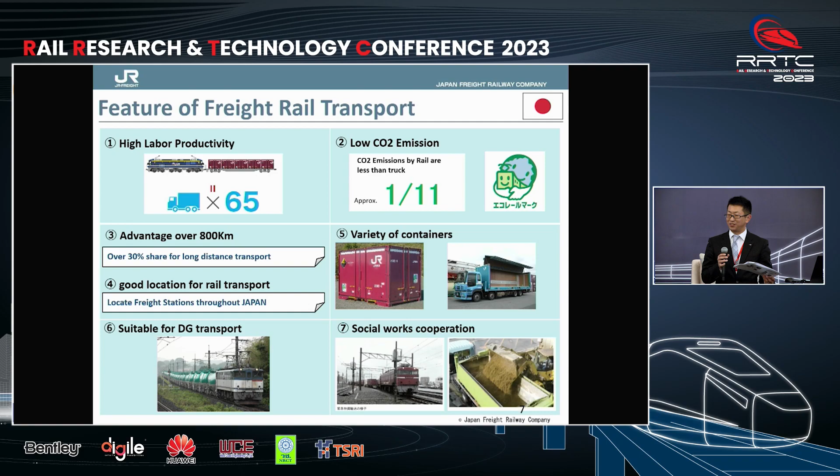Not only railway business, we also engage in real estate business, mainly developing freight stations. For example, two buildings, Tokyo Rail Gate West and Tokyo Rail Gate East, have been completed at Tokyo Freight Terminal Station. The freight station, in front of a huge warehouse, will be utilized to expand logistics.

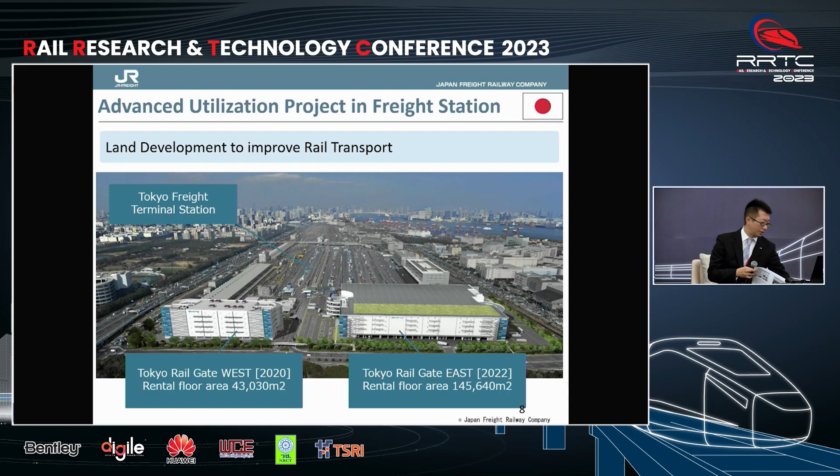Not only in Japan, now JR Freight starts business activity outside of Japan. We are aiming for overseas business, our third pillar. The first pillar is railway business, second is real estate, and third pillar is this overseas business.

We invite many persons from outside government, railway operators, and manufacturers to our facilities to guide them to freight stations and maintenance factories. We also participate in several surveys in countries such as India, Myanmar, Indonesia, and so many others.

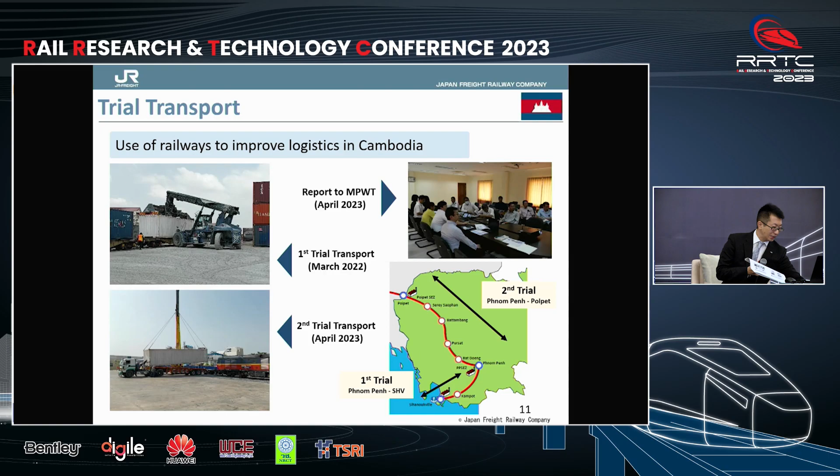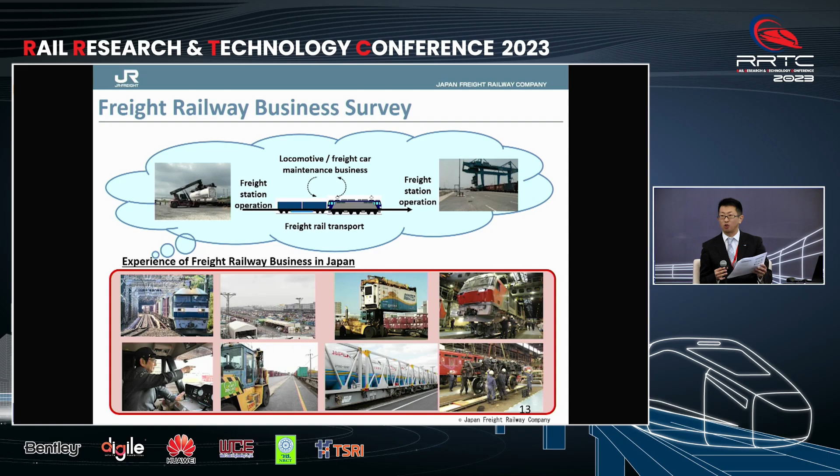Our second theme is our experience at JR Freight Japan. I will pick three examples of our experience, and the first is freight train operation.

In container transport, not only railway transport is needed - we need cargo collection and cargo delivery to connect to our customers. In Japan, this is done by railway forwarders, performed before and after our railway transport. In Japan, railway forwarders exist in many cases, around 150 companies. Collection and delivery are handled by different companies, so JR Freight needs to connect each of the three players to realize one multimodal transport.

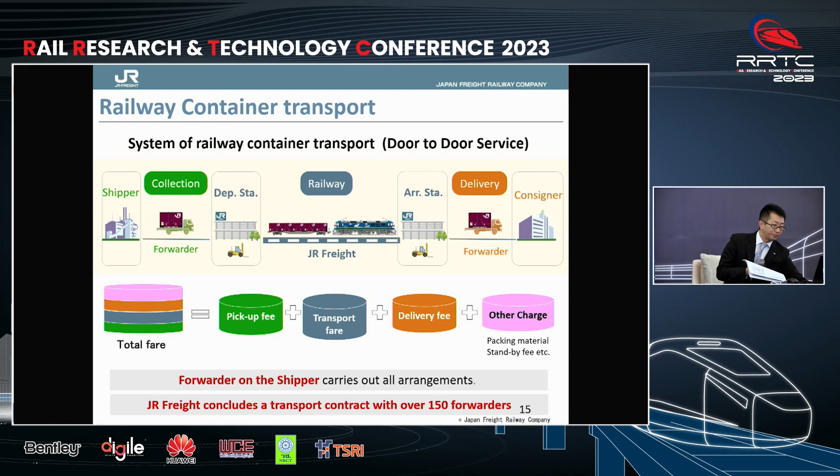Next, talking about layout in the freight station. Since most main lines in Japan have been electrified, almost 70%, work at a conventional freight station in Japan involves many procedures using electric locomotives for the main line and diesel locomotives for shunting. It takes a long time between train arrival and departure. I will show some animation.

After arrival, we need to switch the locomotive from electric to diesel. The first one was electric, and now the diesel locomotive does the shunting. After shunting, we lift on or lift off the containers. After that activity, we need another shunting for departure, and after that we can depart to the main line. This is almost 5 steps.

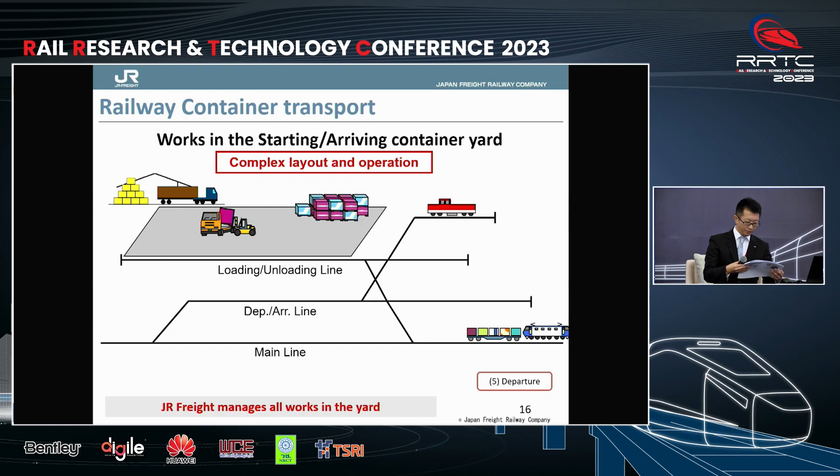In order to make main line operation more efficient, we changed the layout of our freight stations. What we changed was that the track line where the electric locomotive arrives and departs also serves as the cargo handling line. The animation is like this: after arrival, the train goes onto the cargo handling line, and after Lo-Lo operation, the train departs. It's a very simple procedure.

As a result of the new layout, containers that previously could not be unloaded immediately can now be unloaded immediately after arrival, and the freight train can now depart immediately. JR Freight has introduced this new layout at 31 freight stations in Japan.

Next is the system. We use 3 systems to control the entire freight railway transport, named: 1, IT Frens; 2, Trace system; and 3, Driver system. First, IT Frens has an interface with customers and also a management system, and they have a management function for operating freight railway.

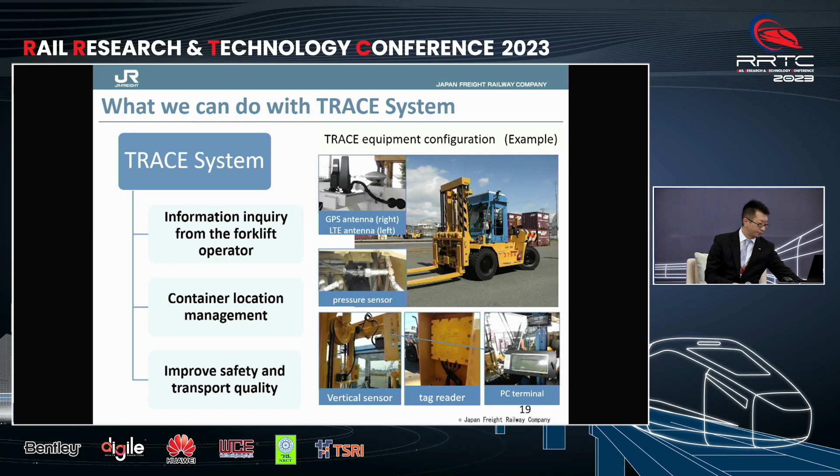In the cabin, the forklift operator checks the container information from IT-FRENS. When the forklift catches the containers, based on the information from IT-FRENS, the operator lifts on and off one container.

Sorry, this is only in Japanese, but they can understand the information about what to do next. Using this information, our operator operates one container per minute.

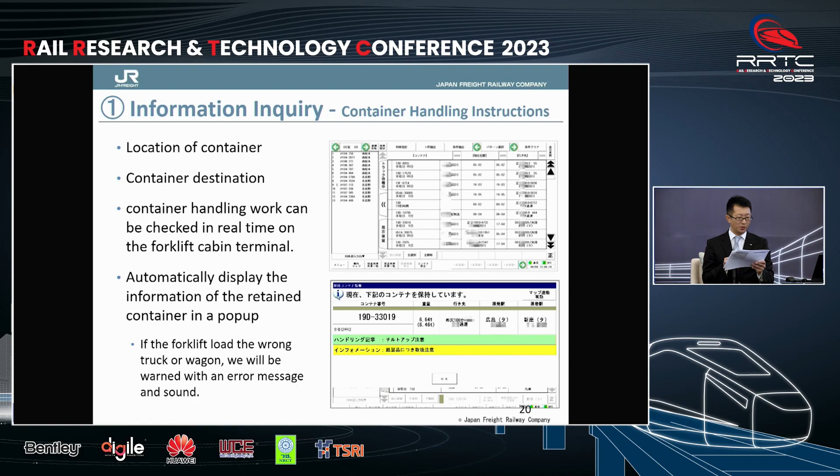This is for your reference. It takes 2 or 3 minutes for a reach stacker in another country like Thailand to lift on and off, or 4 or 5 minutes for a gantry crane at a port operation. So it's an amazingly speedy operation in Japan.

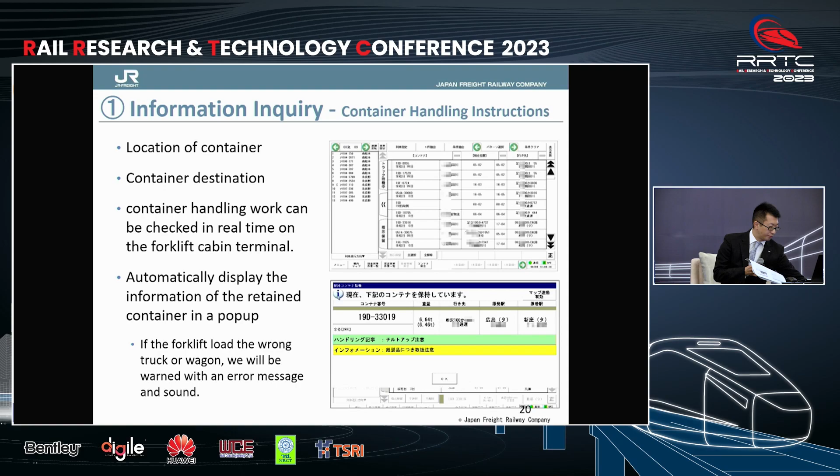Next is safety. Safety is the most important thing for a railway operator. So of course, in the trace system, we guarantee safety. When we handle dangerous goods, we alert the operator like this.

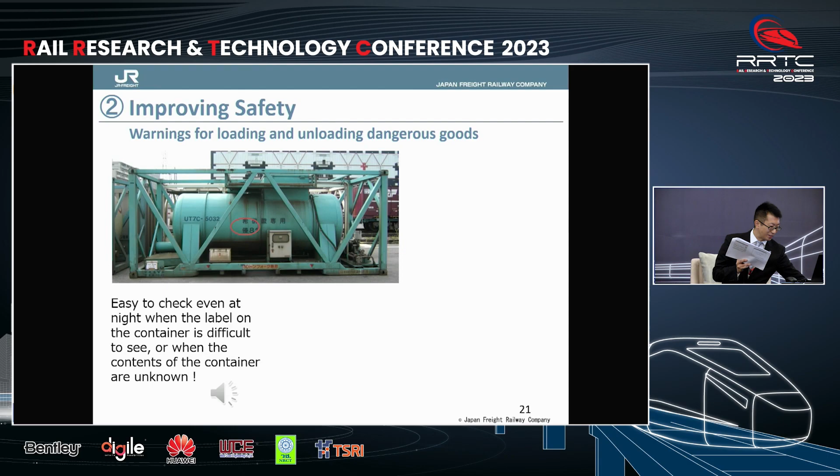Sorry, some sounds happened after that. Okay, no sounds now. But some sounds happen in the operator's cabin.

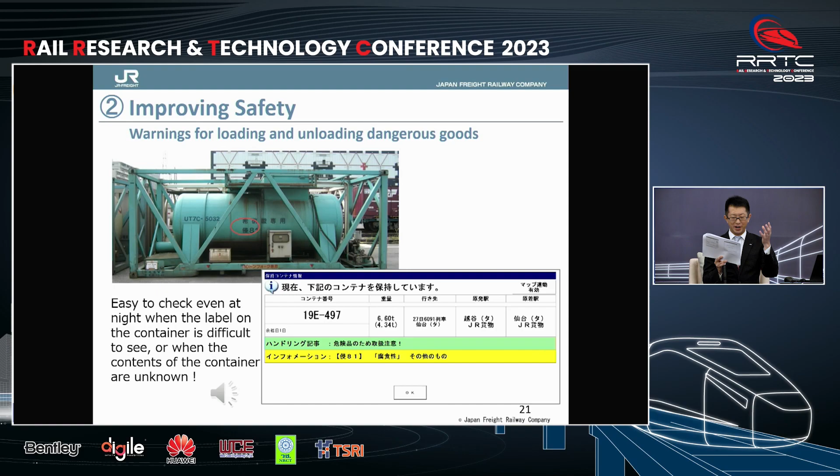The third function is location. Yes, trace is a location system. So not only for our work, but our customers require detailed location of their cargo. We provide real-time cargo location, and we provide accurate container location not only on running trains, but also in container yards.

This is a map of the container yard at our station, and we can trace exactly which container is where.

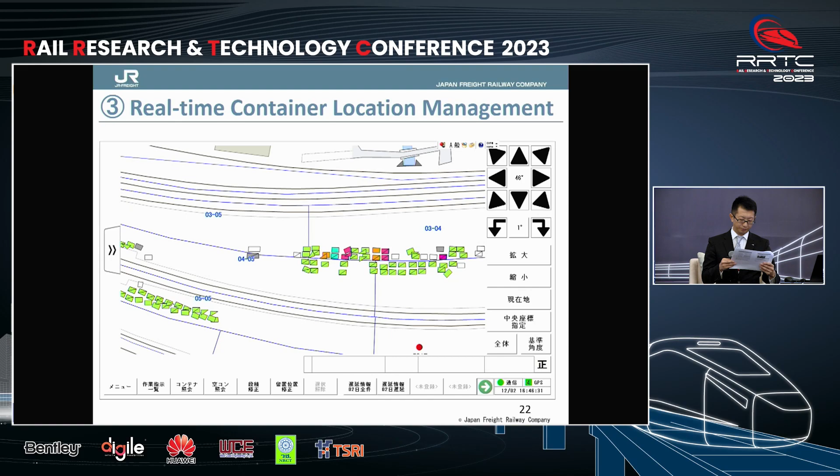Okay, next experience is driver training. I will explain about driver training in Japan.

We train rail drivers in-house at our company. Based on the laws and rules of the Japanese government, JR Freight prepares a course at our own in-house training school and a skill course with actual driving on locomotives. The two courses combined take about one year to train a fully licensed driver.

JR Freight would like to share its knowledge. Maybe one year is shorter than in other countries, so we would like to share this knowledge of driver training with other countries and contribute to solving their problems.

I will introduce the training school in our company. As shown in the photographs, safety is the top priority. So we conduct safety education to learn about serious accidents that occurred in the past. In our school, we also have a classroom for learning signals and a driving simulator.

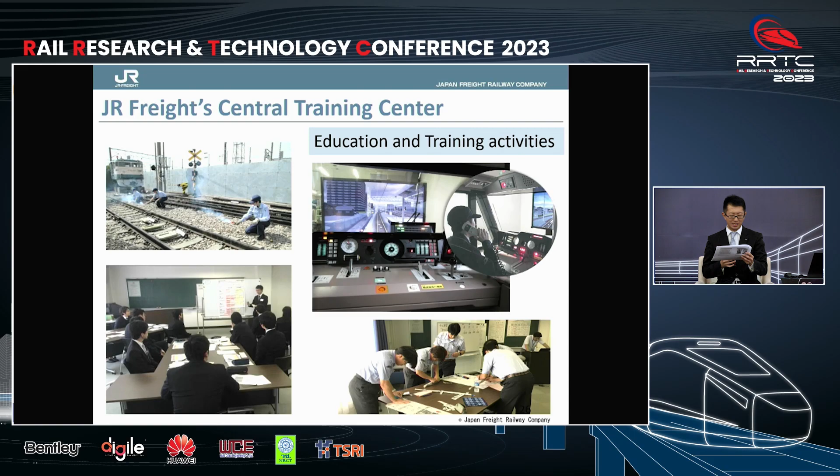After our employees enter the training school, they spend half a year living and eating together while taking intensive training. In addition to desk study, trainees acquire skills through simulator training in which sample trouble occurs.

The next slide shows some samples of simulators. The locomotive simulator is capable of reproducing 20 different types of accidents. The students need to deal with the accident taking place right in front of them quickly and appropriately.

Okay, for the final experience, I will introduce the rolling stock maintenance. First, I would like to explain the environment in which we operate our rolling stocks and perform maintenance.

JR Freight has a railway network from the north to the south of Japan. The environment in the northern area belongs to a sub-Arctic zone, and its winter is so severe. While the southern part belongs to the subtropical zone, the temperature and humidity are high all year round.

Our track gauge is 1067mm, a little wider than GMS countries, which use a 1 meter gauge. And for safety reasons, each rolling stock must be well maintained to stop within 600 meters, even at maximum speed. This is our environment.

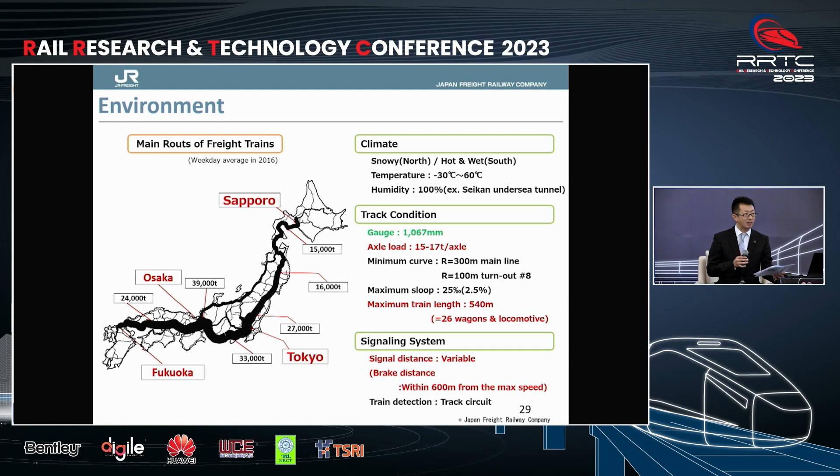We have developed rolling stocks together with manufacturers. We don't buy catalog locomotives. We develop locomotives and rolling stocks with manufacturers and maintain them ourselves.

About 70% of Japanese lines are electrified, as mentioned. We have DC electric locomotives and also AC electric locomotives. On non-electrified lines, we use diesel locomotives.

To reduce the environmental impact, JR Freight also developed the HD300 series, a hybrid diesel locomotive, which has a small diesel engine along with a large storage battery, a lithium-ion battery.

And not only locomotives, we own the wagons. There are two main types of freight wagons: container wagons and tank wagons. Container freight wagons are all owned by JR Freight, and tank wagons are owned by shippers, like oil companies. But maintenance is all undertaken by JR Freight. Also, the dry container is owned and maintained by JR Freight, and some shippers own the tank containers or refrigerator containers, reefer containers.

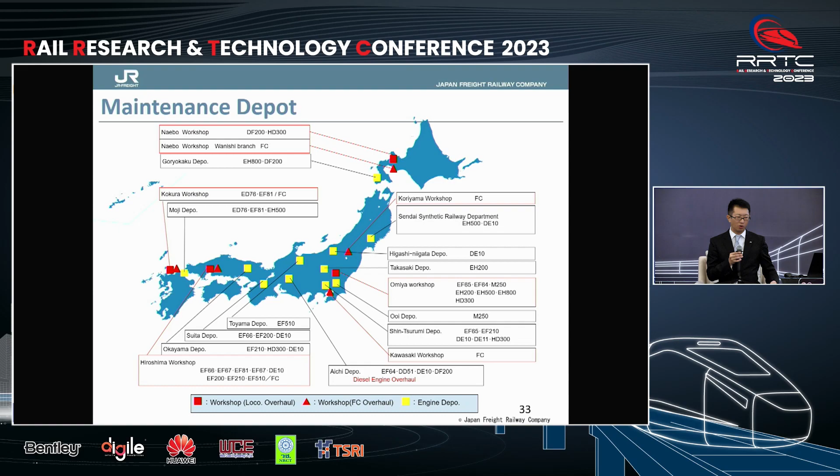Next, we have maintenance depots in each region where each locomotive type is mainly used. There are overhaul depots, four for locomotives, four for freight wagons, so eight overhaul depots total. Based on the railway laws and regulations of the Japanese government, from daily inspection to overhaul, we have four stages of maintenance.

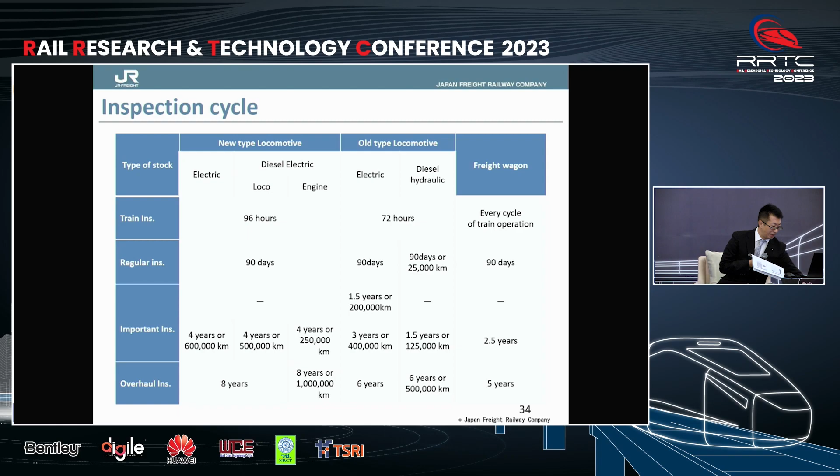In this last presentation, I will pick up three JR Freight advantages in maintenance. The first is the inspection management system. Instead of repairing after it breaks, we analyze the condition of rolling stock and past failures and repair in advance. We call this preventive maintenance. It's a keyword. All work activity is recorded in our IT system and used to share the condition of each rolling stock and analyze failure trends.

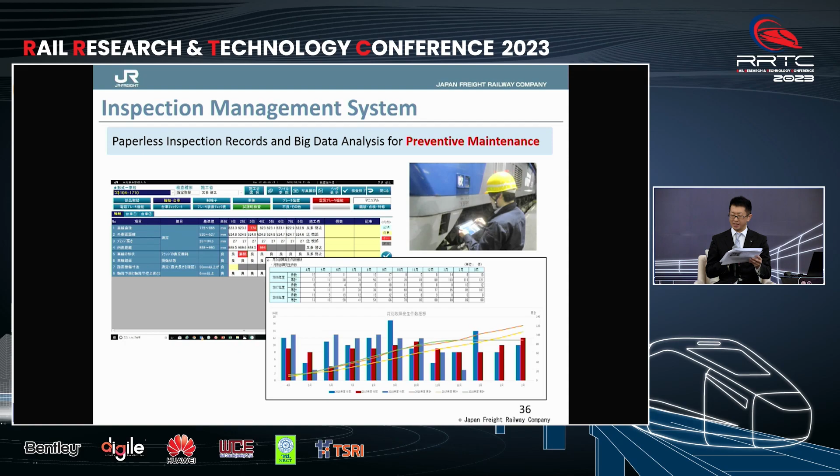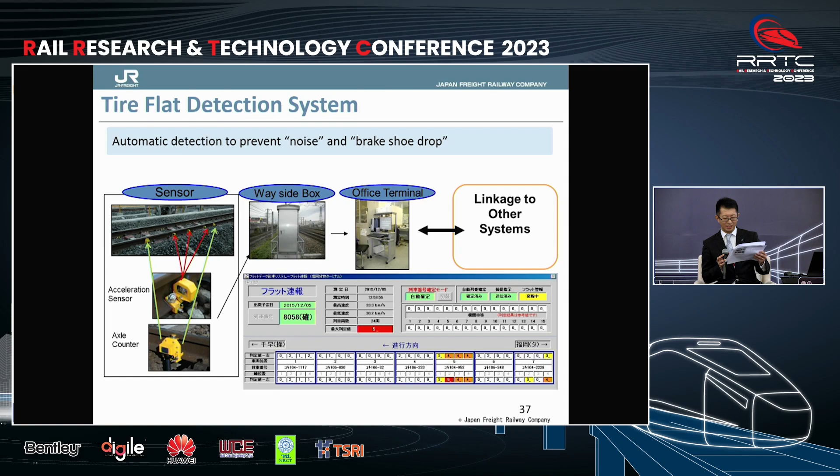Next advantage is the tire flat detection system. Circular wheels are scraped when we use the brakes and a flat surface is formed. For driver safety and transport quality, we need to reduce this condition. We have installed a system to detect flats in several places in Japan, and we take measures such as wagon replacement for serious flats.

Thank you very much. I hope that our experience in Japan will be useful to all of you, and we hope to be able to collaborate with not only Japan, but Thailand and other countries more and more. Thank you very much for your attention. Thank you.

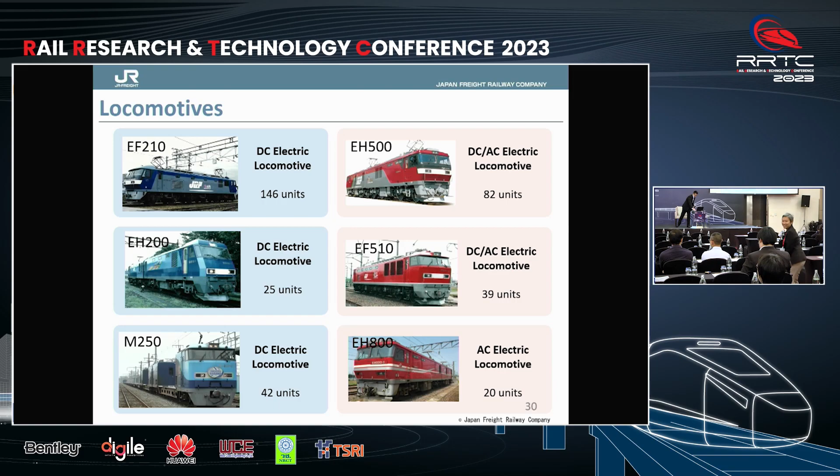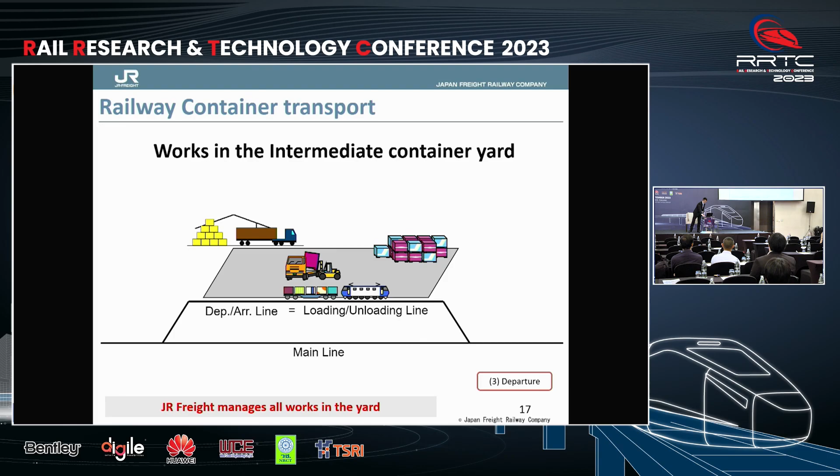My name is Wachira from Chulalongkorn University. You showed that JR Freight owns the container boxes, right? I see that the container boxes of JR Freight have a wide variety of types, long and short ones, like 12 feet, 20 or 31 feet, right? My question is, what is the benefit of having such a wide variety of containers? Why not use a typical 20 feet or 40 feet container? Okay, thank you very much for your question.

The reason why we have so many various containers is we have some history. In the past, Japanese roads were so narrow, so we could not transport big trucks and also big containers. So maybe our fathers', grandfathers' generation thought about which size container is suitable for Japan, and the answer was the 12 feet container. This is not an ISO international container, only a domestic container in Japan. But we're still using this because it's good for small lot transportation.

In Japan, customers require us to provide high quality transport service. It means they don't like, for example, crashes or some trouble for the cargo. Small lot transportation is suitable for Japanese customers, but it's not international. So we are afraid we also need to transport international maritime containers such as 20 feet, 40 feet. So we transport and produce our containers in 20 feet and 40 feet sizes.

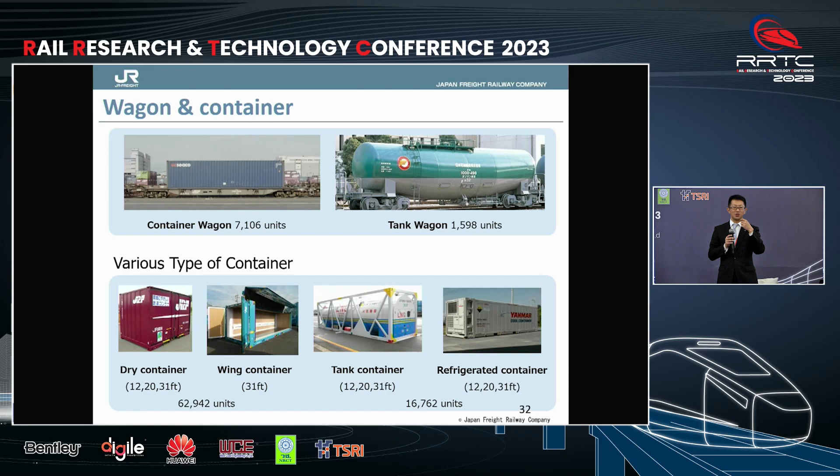We also have another story. In Japan, truck size is getting bigger and bigger, almost 30 feet. But now the Japanese government would like to shift truck transport to railway transport. So we made the same size container as a truck, a 31 feet container, and requested our customers to shift from truck to railway. So we have 12, 20, 31, and 40 feet containers. This is our issue: we need to own so many facilities, but we would like to reduce facilities. So now we are asking customers which size of container they would like to use in the future, so we can decide which container we will invest in. Yeah, this is the current situation.